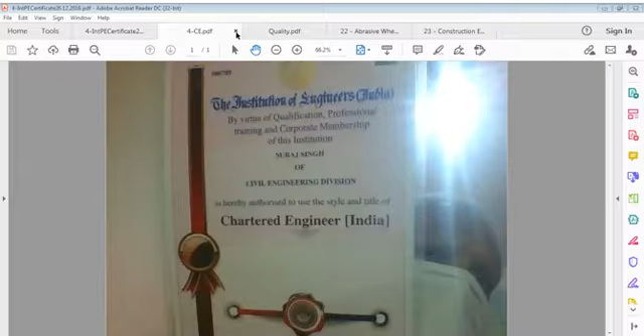Or you can say professional certificate in engineering or otherwise as well - all count a lot if you consider them. And if you just think that it's a piece of paper and it's a ticket to buy a job in market, or to buy reputation in society - you can say for those who have not married to raise their market value, or for those who are married to raise their job value, that is a different one. That is something related to your requirement and related to market requirement. I'm not stressing on that, that's your right.

If you are capable, you shall get job, and if you are not capable, you may get different type of jobs. But wherever you work, one point is very much certain: it is the duty of those professionals, paraprofessionals and others to work with quality aspect and with safety aspect, so that health of everyone remains intact, safety of work is under cover, no work should be unsafe, no person should be unsafe at any time, within controls, within applications. That is the major point.

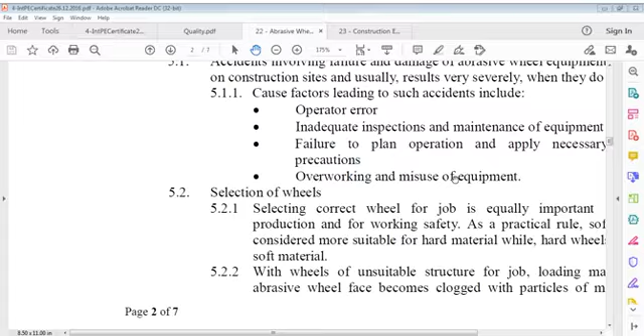We were talking about abrasive wheels last time, abrasive wheels. And we talked about many aspects. Let us go back to what we discussed in those abrasive wheels: purpose, definitions, what these grinders and wheels are like, how can we keep ourselves safe and working safe, what are coarse, medium, fine, very fine types, mountings, etc.

And what we should do in this, what are guards, rests for wheels - all we studied that. Wheel balance, conditions of floor, all we studied in that. Eye protection, etc. we studied in that. Now we go to environment, control and waste disposal.

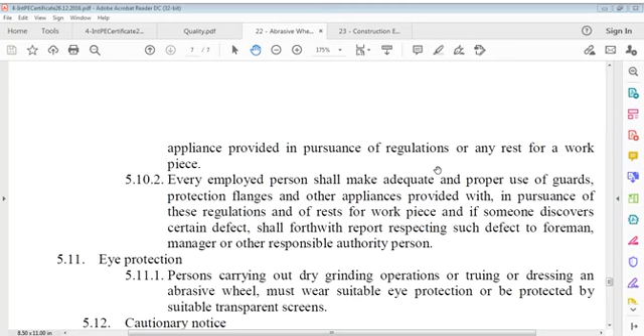I think maybe we did not miss anything in the last chapter, let me be sure. And it was: every employed person shall make adequate and proper use of guards. So let's repeat the last one better, the last fifth page I'll take, so that let us take this.

Let's start here. Summary of mounting precautions. Before mounting, all wheels should be closely inspected and rung to make sure that they have not been mishandled in transit or storage. Means when you open that out, you have to check that. Only competent and authorized persons should carry out wheel mounting.

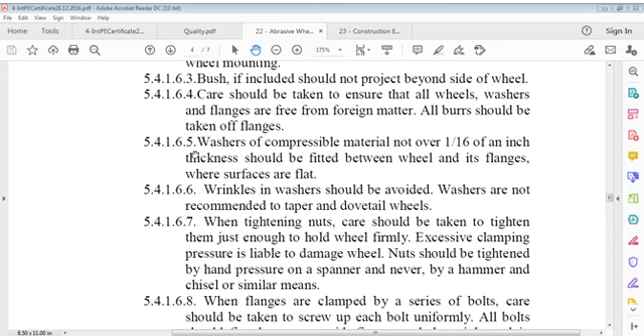Bush, if included, should not project beyond side of wheel. Care should be taken to ensure that all wheels, washers and flanges are free from foreign matter. All burrs should be taken off flanges. Washers of compressible material not over 1/16 of an inch thickness should be fitted between wheels and its flanges where surfaces are flat.

So we have gone through this. Wrinkles in washers should be avoided. Washers are not recommended to taper and dovetail wheels. When tightening nuts, care should be taken to tighten them just enough to hold wheel firmly. Excessive clamping pressure is liable to damage wheel. Nuts should be tightened by hand pressure on a spanner and never by a hammer and chisel or similar means.

Nuts should be tightened by hand pressure on a spanner and never by a hammer and chisel or similar means. When flanges are clamped by a series of bolts, care should be taken to screw up each bolt uniformly. All bolts should first be run up with fingers and then tightened in pattern formation afterwards.

Guards, of course, we discussed guards also. Just repeat it fast: guards shall be securely attached to the body of the machine or straight side wheels. Maximum angular exposure to abrasive periphery and side shall not exceed 180 degrees. Guards for straight grinding machine should be provided with a front curtain which shall be securely fastened to body of machine. For cup wheel, back face and periphery shall be enclosed and guard shall be adjusted to compensate for wear of wheel.

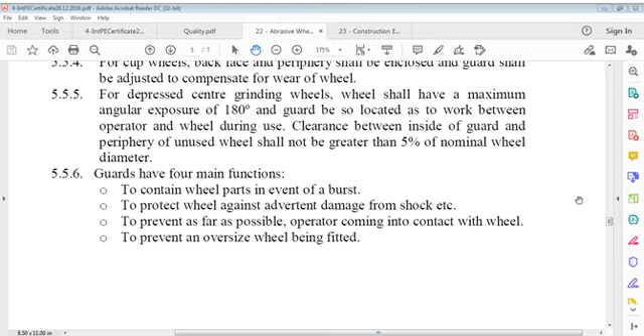Then guards have four main functions. One is to contain wheel parts in event of a burst, meaning wheel parts should be contained within the guard if there's some explosion or burst. To protect wheel against inadvertent damage from shock. To prevent as far as possible operators coming into contact with wheel, and to prevent oversized wheel being fitted.

Rests also we discussed, let us repeat that too. Where there is a rest provided for supporting the work piece, it shall at all times while the wheel is in motion be properly secured and adjusted so as to be as close as practical to the exposed part of the abrasive wheel. Every rest provided must be of substantial construction and properly maintained.

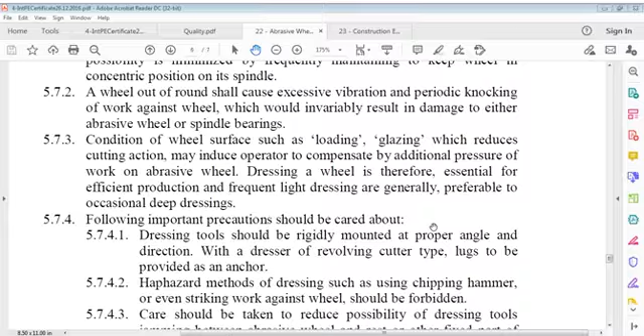Condition of wheel surface such as loading, glazing, which reduce cutting action, may induce the operator to compensate by applying additional pressure of work on the abrasive wheel.

Condition of wheel surface such as loading or glazing, which reduces cutting action, may induce the operator to compensate by additional pressure of work on the abrasive wheel. Dressing a wheel is therefore essential for efficient production, and frequent light dressings are generally preferable to occasional deep dressing.

Now there are certain precautions which must be taken care of. Dressing tools should be rigidly mounted at the proper angle and direction, and with a revolving cutter type dresser, lugs should be provided as an anchor.

Haphazard methods of dressing, such as using a chipping hammer, or even striking work against the wheel, should be forbidden.

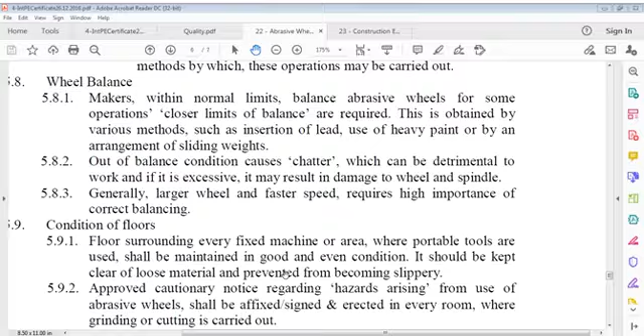Out of balance condition causes chatter, which can be detrimental to work, and if it's excessive, it may result in damage to the wheel and spindle. Generally, larger wheels and faster speeds require greater importance on correct balancing.

Condition of floors. Floors surrounding every fixed machine, or the area where portable tools are used, shall be maintained in good and even condition. It should be kept clear of loose material and prevented from becoming slippery.

An approved cautionary notice regarding hazards arising from the use of abrasive wheels shall be affixed, signed, and erected in every room where grinding or cutting is carried out.

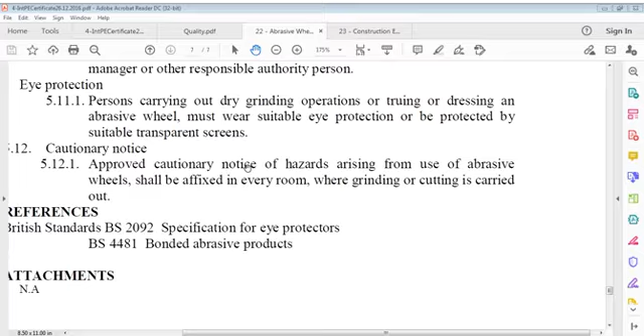References are BS codes 2092 and 4481. One is specific for eye protection, the other for bonded abrasive products.

And then we can go to environmental controls and waste disposal. This is a very interesting topic for everybody, and this point must be understood properly.

So, environment control and waste disposal is what I'm talking about, which is very interesting for everybody. What are we actually talking of here? Adherence to requirements in the environmental control procedure shall minimize the impact of construction activities on land, air, water, flora and fauna.

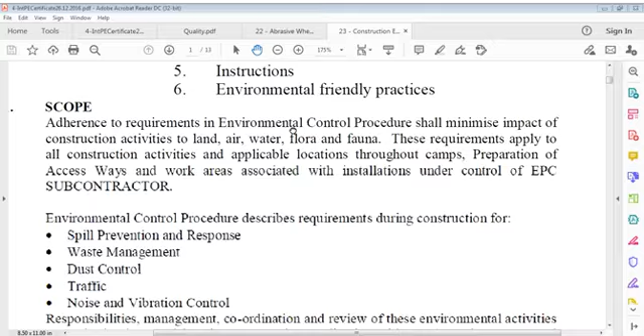Environmental protection we are talking about, environment control and waste disposal.

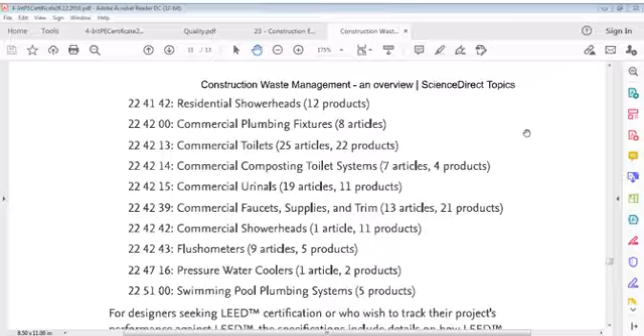So we'll go back. Now, choosing materials and products, choosing materials and products. This is a paper written by Sam Kubba, PhD, LEED AP, on Green Construction Project Controls, Construction Waste Management.

General application of a construction waste management plan is to minimize the amount of materials going to landfills during construction, by diverting construction waste, demolition, and land clearing debris from landfill disposal. It also helps redirect recyclable recovered resources back to the manufacturing process, and redirect reusable materials to appropriate sites.

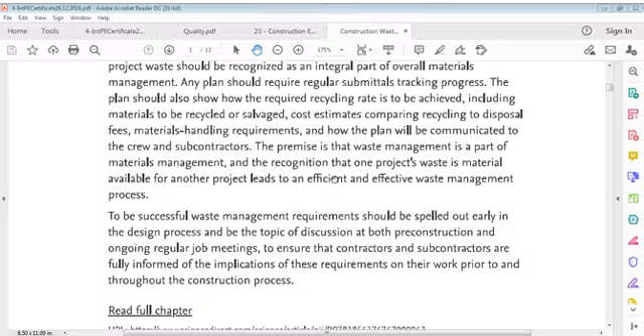The premise is that waste management is a part of materials management, and recognition that one project's waste can be a material available for another project leads to an efficient and effective waste management process. It's a very important point.

Waste management requirements should be spelled out early in the design process, and should be the topic of discussion at both pre-construction and ongoing regular job meetings, to ensure that contractors and subcontractors are fully informed of the implications of these requirements on their work, prior to and throughout the construction process.

We have LEED trademark documentation, process, and technical requirements here. So, summary of best practices: locate in an existing building and reuse as much of the building materials as possible.

Provide easily accessible collection and storage points for recyclable material. Apply construction waste management operations in building out a tenant space to reduce debris, by recycling these materials. Property management firms, for example, require contractors to recycle a minimum of 50% of waste generated on site.

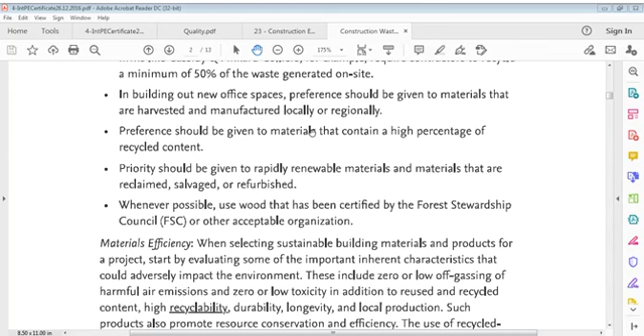In building out new office spaces, preference should be given to materials that are harvested and manufactured locally or regionally, and to materials that contain a high percentage of recycled content. Priority should be given to rapidly renewable materials and materials that are reclaimed, salvaged, or refurbished. Whenever possible, use wood that has been certified by the Forest Stewardship Council or other acceptable organizations.

Materials efficiency: when selecting sustainable building materials and products for a project, start by evaluating some important inherent characteristics that could adversely impact the environment. These include zero or low off-gassing of harmful air emissions, and zero or low toxicity, in addition to reused and recycled content, high recyclability, durability, longevity, and local production.

I repeat: when selecting sustainable building materials and products for a project, start by evaluating some important inherent characteristics that could adversely impact the environment. These include zero or low off-gassing of harmful air emissions and zero or low toxicity, in addition to reused and recycled content, high recyclability, durability, longevity, and local production.

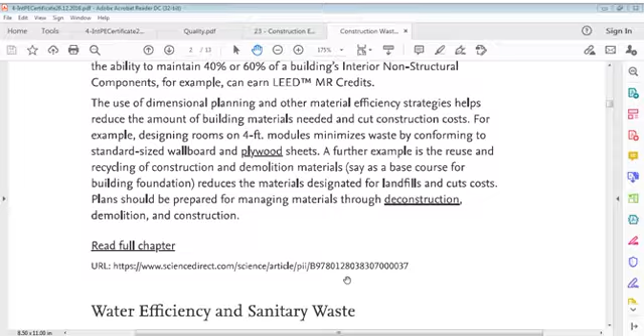Use of dimensional planning and other material efficiency strategies helps reduce the amount of building materials needed and cut construction costs. For example, designing a room on 4-foot modules minimizes waste by conforming to standard sized wallboard and plywood sheets. A further example is reuse and recycling of construction and demolition materials, say as a base course for building foundation, which reduces materials designated for landfills and cuts costs. Plans should be prepared for managing materials through deconstruction, demolition, and construction.

Water efficiency and sanitary waste. Construction waste management.

Commercial construction typically generates between 2 and 2.5 pounds of solid waste per square feet, the majority of which is recyclable. Salvaging and recycling construction and demolition waste can substantially reduce the demand for virgin resources and associated environmental impacts. Additionally, effective construction waste management, including appropriate handling of non-recyclables, can reduce contamination from and extend the life of existing landfills. Whenever feasible, reducing initial waste generation is environmentally preferable to reuse or recycling.

A construction waste management plan should recognize project waste as an integral part of overall materials management. The premise being that waste management is part of materials management, and recognizing that one project's waste may be materials available for another project facilitates efficient and effective waste management. Moreover, waste management requirements should be included as a topic of discussion during both the pre-construction phase and ongoing regular job meetings, to ensure contractors and subcontractors are fully aware of the implications of these requirements on their work, prior to and throughout construction. Waste organization should be coordinated with the standard quality assurance program and addressed regularly throughout the project.

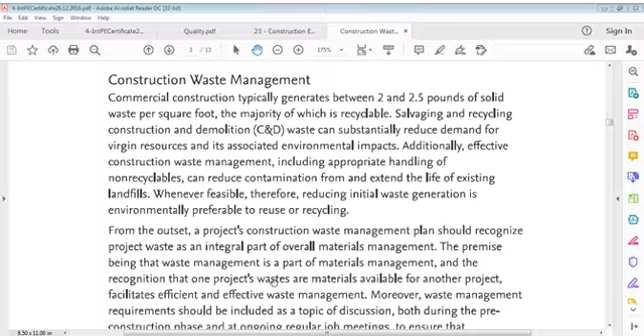Construction waste management. Commercial construction typically generates between 2 and 2.5 pounds of solid waste per square feet, as we said before, the majority of which is recyclable. Salvaging and recycling construction and demolition, or C&D, waste can substantially reduce demand for virgin resources and its associated environmental impacts. Additionally, effective construction waste management organization, including appropriate handling of non-recyclables, can reduce contamination from and extend the life of existing landfills. Whenever feasible, reducing initial waste generation is environmentally preferable to reuse or recycling.

From the outset, the project's construction waste management plan should recognize project waste as an integral part of overall materials management. The premise being that waste management is part of materials management, and recognition that one project's waste or materials may be available for another project facilitates efficient and effective waste management. Moreover, waste management requirements should be included as a topic of discussion both during the pre-construction phase and ongoing regular job meetings, to ensure contractors and appropriate subcontractors are fully aware of the implications of these requirements on their work prior to and throughout construction.

Construction waste management, I think it's the same. It's the same. I think there's some repetition on this, it's useless.

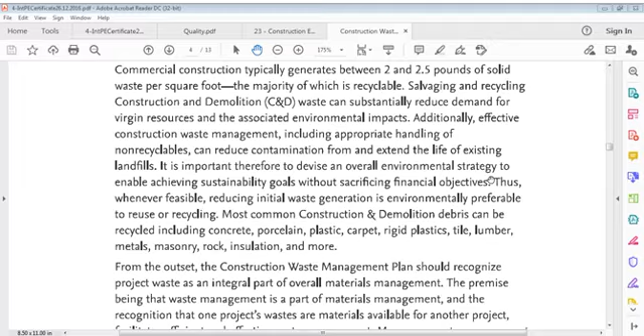So, construction waste management, sir.

The broad intent of the construction waste management credit is to avoid material going to landfills during construction, by diverting construction, demolition and land clearing debris from landfill disposal.

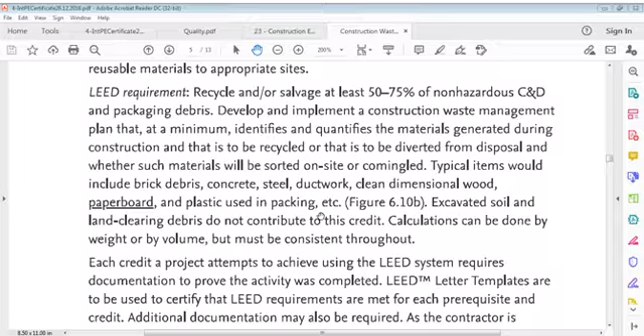Develop and implement a construction waste management plan that, at a minimum, identifies and quantifies materials generated during construction that are to be recycled or diverted from disposal, and whether such materials shall be sorted on site or commingled. Typical items would include brick debris, concrete, steel, ductwork, clean dimensional wood, paperboard and plastic used in packing, etc. Excavated soil and land clearing debris do not contribute to this credit, as we said.

They give credit for these items.

Calculations can be done by weight or by volume but must be consistent throughout. Each credit a project attempts to achieve using the LEED system requires documentation to prove the activity was completed. LEED letter templates are used to certify that requirements are met for each prerequisite and credit. Additional documentation may also be required.

The contractor is responsible for construction waste organization and shall generally be responsible for completing required LEED letter template documentation for these two credits. Documentation required includes: providing a LEED letter template signed by the architect, owner or other responsible party; tabulating total waste material quantities diverted and the means by which they were diverted; and declaring that credit requirements have been met.

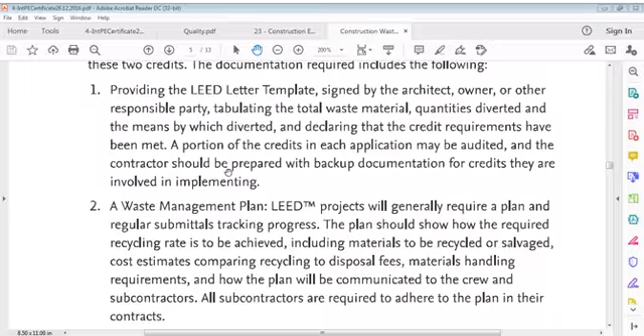A portion of credits in each application may be audited, and the contractor should be prepared with backup documentation for credits that are involved in implementing a waste organizational plan.

Projects will generally require a plan and regular submittals tracking progress. The plan should show how the required recycling rate is to be achieved, including material to be recycled or salvaged, cost estimates comparing recycling to disposal fees, materials handling requirements, and how the plan shall be communicated to crew and subcontractors. All subcontractors are required to adhere to the plan in their contracts.

Design considerations related to construction waste reduction: smaller projects use less material, reducing both solid waste and operating costs.

Assembly should be designed to match standard dimensions of material to be used. Assembly design should be considered so that materials can be readily reused or recycled. Clips and stops should be employed to support drywall or wood paneling at top plates, walls and corners. Clips can provide potential for two-stud corners, reducing wood use, easing electrical and plumbing rough-in, and improving thermal performance.

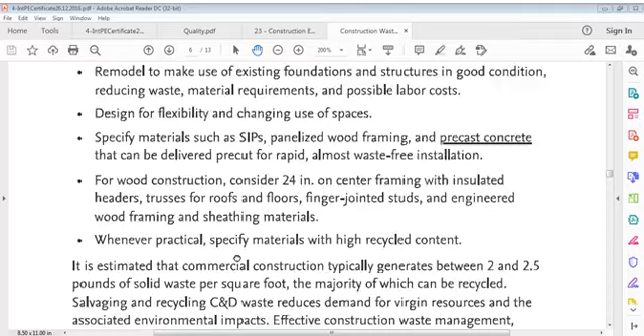Whenever practical, specify materials with high recycled content.

It's estimated that commercial construction typically generates between... this has been given before, so there's some repetition here.

A construction waste management plan should, from the outset, recognize project waste as an integral part of overall materials management — the premise that waste management is part of materials management, and the recognition that one project's wastes are materials available for another.

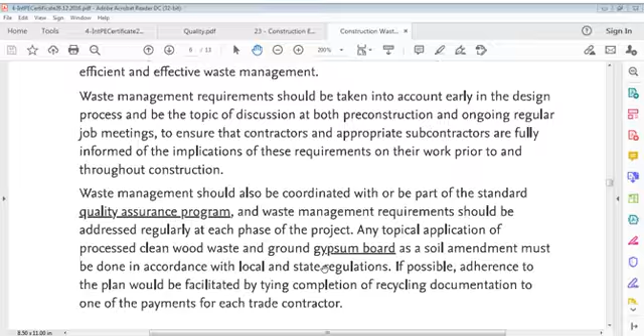Waste management requirements should be taken into account early in the design process and be a topic of discussion at both pre-construction and ongoing regular job meetings. Waste management should also be coordinated with or be part of the standard quality assurance program, and requirements should be addressed regularly at each phase of the project.

Topical application of processed clean wood waste and ground gypsum board are all okay. Now we'll move on to something else.

Construction demolition waste using GIS tools.

GIS consists of a set of tools for storing data, processing and documenting geographic information in a given area of interest. From the perspective of an environmental study, geographic data can represent different elements in local data, such as socio-economic, physical and geological data, among others.

GIS is an evaluation tool that can be used collaboratively with several other modules that estimate environmental impacts and the consequences of a project. In the context of construction waste organization, GIS can have several applications.

GIS can improve the accuracy of building stock models by increasing the availability of geo-referenced information, enabling analysis of material accumulation in time and space. With GIS tools it is possible to perform several spatial analyses applied to construction and demolition waste management, such as mapping illegal dumping sites, assessing environmental risks, and identifying locally suitable areas for installing landfills and recycling plants.

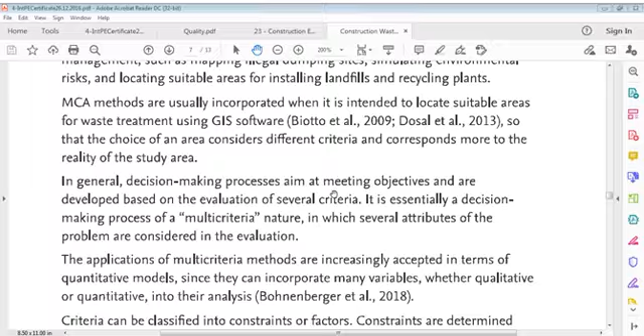MCA methods are usually incorporated when it's intended to locate suitable areas for waste treatment using GIS software, so that choice of an area considers different criteria and corresponds more to reality of the study area. In general, decision-making processes aim at meeting objectives and are developed based on evaluation of several criteria. It is essentially a decision-making process of a multi-criteria nature in which several attributes of problems are considered in evaluation.

Applications of multi-criteria methods are increasingly accepted in terms of quantitative models, since they can incorporate many variables, both qualitative and quantitative, into their analysis. Criteria can be classified into constraints or factors. Constraints are determined according to Boolean logic, a value of 1 or 0, which represent respectively yes or no, to identify suitable areas and remove inappropriate areas from analysis.

On the other hand, factors are of continuous nature and represent a variation of suitability, thus qualifying areas according to characteristics relevant to the study. In order to select suitable locations for receiving and treating waste, the decision maker needs to analyze different aspects such as generator distance, competitiveness and acceptance of the surrounding population, among others. Generally, MCA methods use scores on several criteria correlated to different alternatives, having weights related to compensations between these criteria.

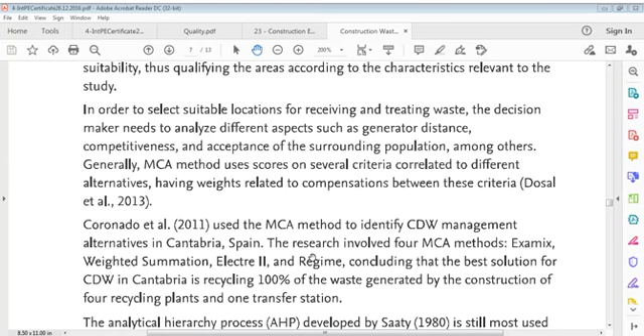Coronado used the MCA method to identify CDW management alternatives in Cantabria, Spain. The research involved four MCA methods. The design concluded that the best solution for CDW in Cantabria is recycling 100% of waste generated, through the construction of 4 recycling plants and one transfer station.

Now, the analytical hierarchy process, AHP, developed by Saaty, is still the most used method for decision making. Traditional methods of area selection include graphical methods, diffuse comprehensive assessment, and gray grouping method. On the other hand, use of GIS and AHP can effectively solve the problem of installing landfills and recycling plants.

Silva developed a methodology to support the decision-making process in choice of the best land alternatives for installation of a CDW recycling plant in the city of Ponta Grossa, Parana, Brazil. The AHP method was used to evaluate environmental, social and economic impacts of the recycling plant installation.

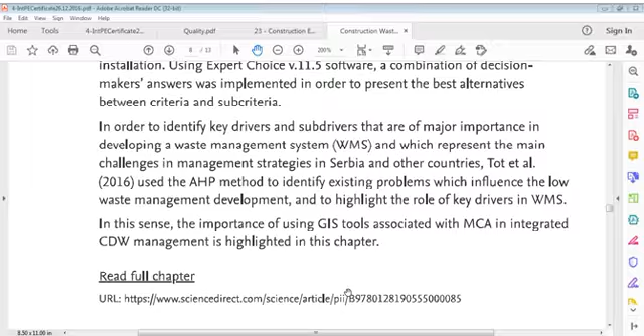In this sense, the importance of using GIS tools associated with MCA in integrated CDW management is highlighted.

Greening your specification. Construction documents typically consist of working drawings and specifications, and are essential to convey the building design concept to the contractor. They provide the contractor with necessary information to bid and build a project. The more accurately a concept is conveyed, the more likely it is to be realized. It's important, therefore, that building specifications be an integral part of written documents and that they go hand in hand with drawings. They describe materials to be used as well as methods of installation.

They also prescribe quality and standard of construction required to be achieved on the project. Thus, in order to facilitate communication of the building design concept, the construction industry has a standardized format for construction documents. Working drawings describe location, size and quantity of materials, whereas specifications, written documents that accompany working drawings, describe quality of construction. For example, if a working drawing shows a plaster wall, specifications would include description of plaster mix, lath and paper backing, and finishing techniques.

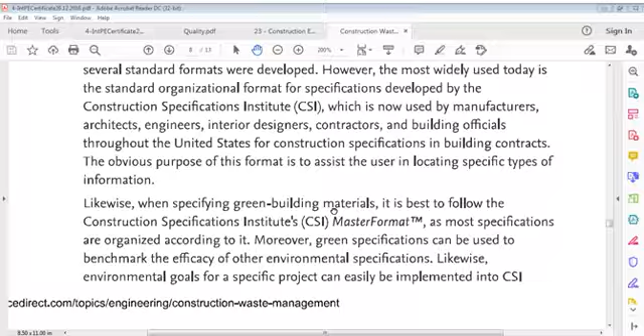Likewise, when specifying green building materials, it's best to follow the Construction Specifications Institute master format, as most specifications are organized according to it. Moreover, green specifications can be used to benchmark efficacy of other environmental specifications. Likewise, environmental goals for a specific project can easily be implemented in the CSI, Construction Specifications Institute master format.

There is also a wealth of information on greening your specifications on the internet. EPA format in particular is designed to help supplement project specifications. Furthermore, the EPA team shall reportedly assist in development of modifications of project specifications to meet LEED credit requirements. But in order to achieve this, a clear understanding is necessary of how specifications can best be used as a proactive mechanism to assist in procuring materials that are environmentally friendly and in collecting required LEED information for subcontractors and suppliers.

Building Green has extensive information on sustainable design based on CSI hierarchy. Specifications are general guidelines as to product selection and installation and may not be appropriate for a specific project, which is why before using Building Green guideline specifications, the reader should read the disclaimer. Further information regarding GreenSpec can be found on buildinggreen.com.

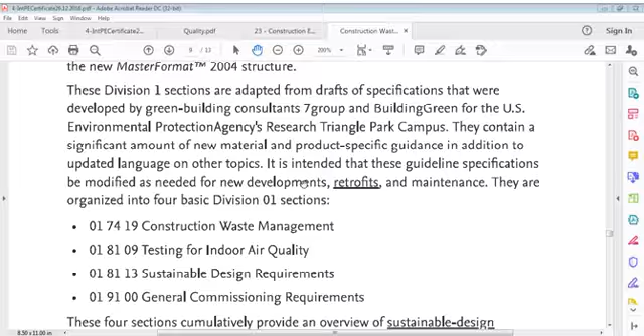They contain a significant amount of new material and product specific guidance in addition to updated language on other topics. It's intended that these guideline specifications be modified as needed for new developments, retrofits, and maintenance. They are organized into four basic divisions of 01.

Construction waste management organization, testing for indoor air quality, sustainable design requirements, and general commissioning requirements. These four sections cumulatively provide an overview of sustainable design requirements that may be applied to a wide variety of projects.

When these sections are applied in actual project specifications, specific requirements must be inserted throughout the construction documents to ensure compliance with sustainable design intent. In the revised GreenSpec format, product listings in each division are divided into separate sections, following as much as possible the MasterFormat system. Each section starts with a summary of environmental considerations relating to products in that section.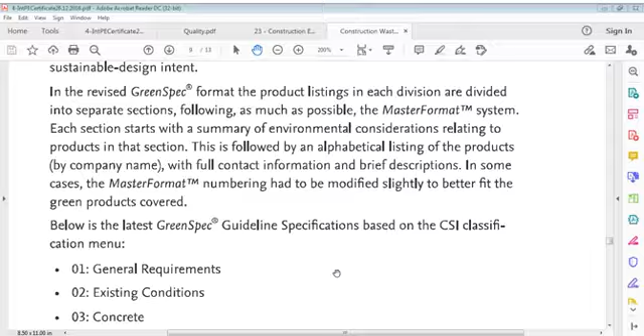These divisions, the MasterFormat numbering had to be modified slightly to better fit green products coverage. Below is the latest GreenSpec CSI classification: general requirements, existing conditions, concrete, masonry, metals, wood, plastics and composites, thermal and moisture protection, openings, finishes, specialties, equipment, furnishings, special construction, conveying equipment, plumbing.

So we say, what are specialties? We have to read. Just a minute please, let me put on my switch. I have to take some water. I'll put the electric switch on.

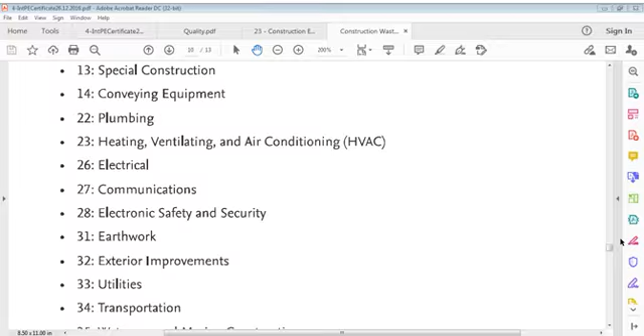So in this list we can say: general requirements, existing conditions. These guideline specifications are based on the CSI classification menu: general requirements, existing conditions, concrete, masonry, metals, wood, plastics and composites, thermal and moisture protection, openings, finishes, specialties, equipment, furnishings, special construction, conveying equipment, plumbing, heating ventilation and air conditioning, electrical, communications, electronic safety and security, earthwork, exterior improvements, utilities, transportation, waterway and marine construction, process heating cooling and drying equipment, pollution control equipment, electric power generation.

More detailed information by simply clicking, or leave it now. For example, by clicking on this plumbing section you will get additional information, such as operation and maintenance of plumbing fixtures.

Operation and maintenance of plumbing fixtures, plumbing insulation, domestic water piping, sanitary sewerage facilities, sanitary waste and vent piping facilities, storm drainage, grey water systems, domestic water filtration equipment, fuel fired residential water heaters, fuel fired commercial water heaters, domestic water heat exchangers, residential toilets.

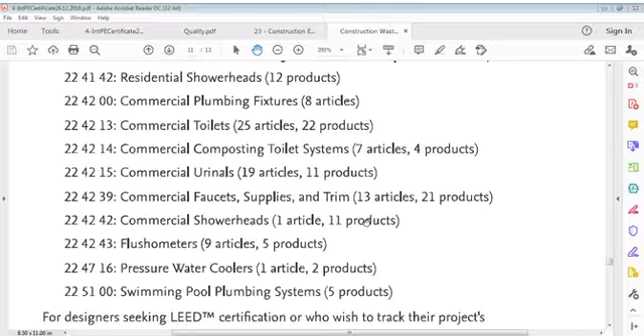Composting toilets, residential urinals, residential lavatories and sinks, residential faucets, supplies and trim, residential shower heads, commercial plumbing fixtures, commercial toilets, commercial composting toilet systems, commercial urinals, commercial faucet supplies and trim, commercial shower heads, flushometers, pressure water coolers, swimming pool plumbing systems.

For designers seeking certification, or who wish to track their project's performance against LEED, the specifications include details on how LEED requirements relate to the expressed requirements. Many LEED credits may not be addressed directly in the guideline specifications, primarily because attaining those credits is determined by choices made in site selection or design, and are not affected by product choices or other activities covered by these sections. Responsibility lies with the designer to ensure that whatever such credits have been satisfactorily addressed in the design and construction process.

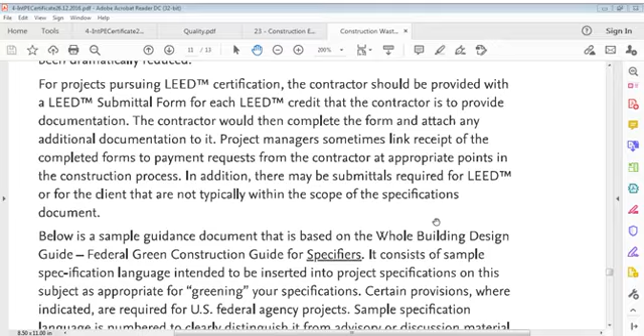Below is a sample guidance document based on the Whole Building Design Guide, Federal Green Construction Guide for Specifiers. It consists of sample specification language intended to be inserted into the project specification on this subject as appropriate for greening your specification. Certain provisions, where indicated, are required for US federal agency projects. Sample specification language is numbered to clearly distinguish it from advisory or discussion materials. Each sample is preceded by identification of its typical location in the specification section. I'll also leave this. Now, specifier note.

Resource management: plant fabrication handles raw materials and byproducts at a single location, which typically allows greater efficiency and better pollution prevention than job site fabrication.

Aggregates for use in concrete include normal sand and gravel, crushed stone, expanded clay, expanded shale, expanded slate, pelletized or extruded fly ash, expanded slag, perlite, vermiculite, expanded polystyrene beads, processed clay, diatomite, pumice, scoria or tuff.

Architectural items such as planters, lintels, and bollards fabricated from lightweight and recycled content aggregates are available. Quantity and type of recycled materials vary from manufacturer to manufacturer and include cellulose, fiberglass, polystyrene and rubber.

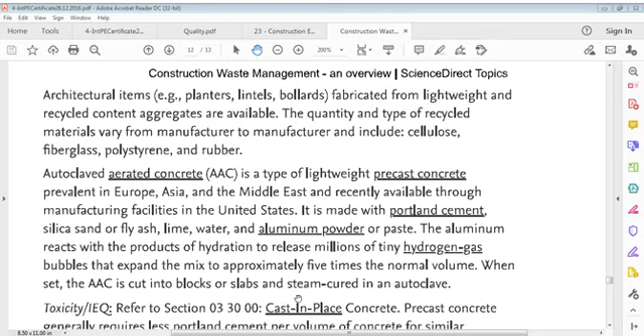Autoclaved aerated concrete (AAC) is a type of lightweight precast concrete prevalent in Europe, Asia and the Middle East, and recently available through manufacturing facilities in the United States. It's made with Portland cement, silica, sand, fly ash, lime, water, and aluminum powder or paste. Aluminum reacts with products of hydration to release millions of tiny hydrogen gas bubbles that expand the mix to approximately 5 times its normal volume. Once set, AAC is cut into blocks and slabs and steam cured in an autoclave.

Compared to cast-in-place concrete, precast concrete generally requires less Portland cement per volume of concrete for similar performance due to better quality control. Performance is more predictable in precast operations since more exact dimensions, placement of reinforcing, and surface finishing can be obtained. Precast concrete can be fabricated with continuous insulation and autoclaved aerated concrete.

Autoclaved aerated concrete is significantly lighter, about one-fifth the weight of traditional concrete, and can be formed into blocks or panels. Lighter weight concretes generally have greater fire and thermal resistance but less strength than traditional normal weight concrete. A full range of lightweight concrete is available in varying strength.

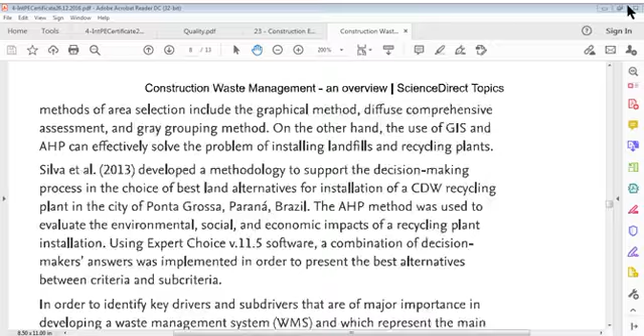Okay, leave it now, we will go further. I'll save this document for reference only. That's all, it's a reference and that's going to work. So I save this and close this document now. We have gone through these documents to see what was there. Now I'll go to close this and construction waste management, and we'll concentrate on this. I was talking of this document which we are destined for.

Adherence to requirements in the environmental control procedure shall minimize the impact of construction activities on land, air, water, flora and fauna. These requirements apply to all construction activities and applicable locations throughout camps, including preparation of access ways and work areas associated with installations under control of the contractor, whatever contractor. The environmental control procedures describe requirements during construction for spill prevention and response, waste organization management, dust control, traffic, noise and vibration control.

Organization, coordination and review of these environmental activities are to be implemented by the site leader in coordination with the quality department and safety department. The environmental control procedure describes environmental compliance activities for the EPC contractor, construction personnel and their subcontracted entities.

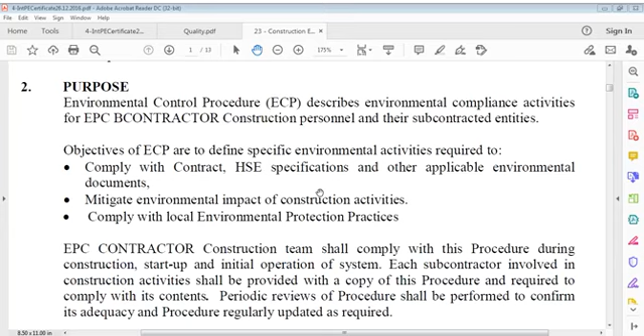Environmental control procedures describe environmental compliance activities for the EPC contractor, construction personnel and their subcontracted entities. Objectives of the ECP are to define specific environmental activities required to comply with contract and safety specifications, HSE specifications, and other applicable environmental documents; to mitigate environmental impact of construction activities; and to comply with local environmental protection practices. The EPC contractor construction team shall comply with this procedure during construction, startup and initial operation of the system. Each subcontractor involved in construction activities shall be provided with a copy of this procedure and required to comply with its contents. Periodic reviews of the procedure shall be performed to confirm its adequacy,

and the procedure regularly updated as required.

Definitions in this safety section - we defined safety already: safety, health, environment. These disciplines support project activities, and company, who is a promoter, contractor, subcontractor, client. Personal responsibility means training, management, safety manager - all same, nothing new in this.

Employer, representative, contractor representative, waste - yes, waste is important here. Material or effluent or other unwanted surplus substance that requires disposal because it cannot be reused or recycled or there is no economic demand for it.

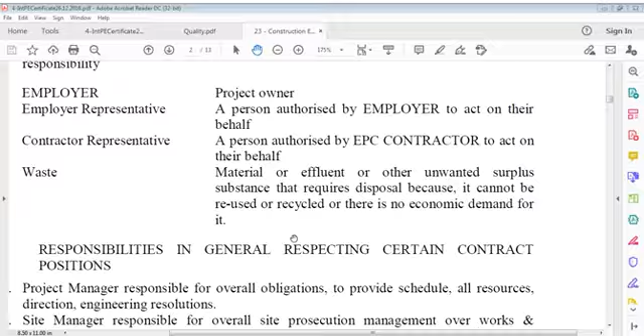Responsibilities in general respecting certain contract positions. We know project manager has to do everything, responsible for everything. Site leader, safety leader, construction leader, project site engineer, safety inspector, etc. - all uniformly, all the time. Responsibilities same way we can say instructions here, meaning health, safety and environment impact assessment.

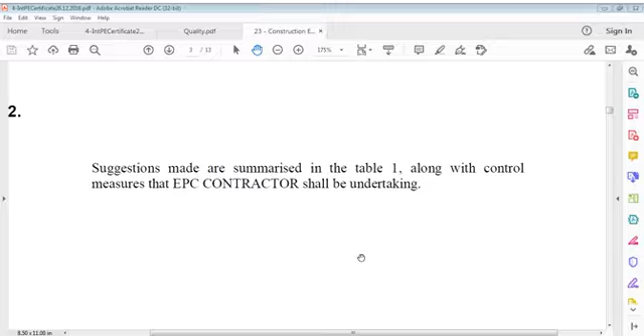This assessment prepared includes an assessment of impact of construction activities and construction camp on environment, and suggests measures to mitigate impact. Now we are giving some suggestions along with control measures that contractors shall be undertaking in this table 1.

Table 1 - I will squeeze it down so we can see better. Maybe it's difficult to read, but I'll blow it up later. Here is environmental issue, suggestions, and contractors control measures. One issue is contaminated land. Another issue is protection of groundwaters and wadis. Then site preparation, dust, noise, construction camp, oil spillage. Let us consider these one by one.

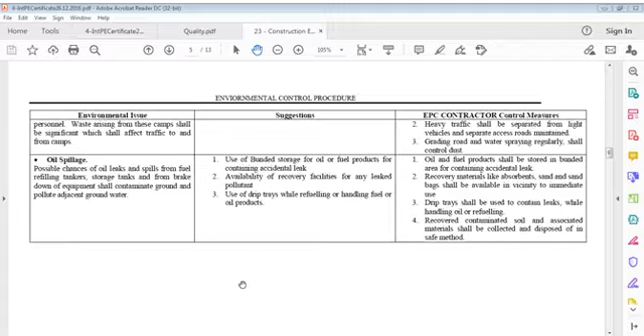Contaminated land - what is that? Contamination of land by some accidental oil spill or effluent during construction activities. So what happens? Solution is soil from areas of contamination shall be removed and disposed of to an approved landfill location. Contractors shall contact local authorities for disposing contaminated soil in appropriate landfill.

Next is protection of groundwater and wadis. Groundwaters and other water sources like wadis are utilized for agriculture and cattle feeding by local population, and for weeds and plants growing in the area. This water source has to be protected from pollution from construction activities.

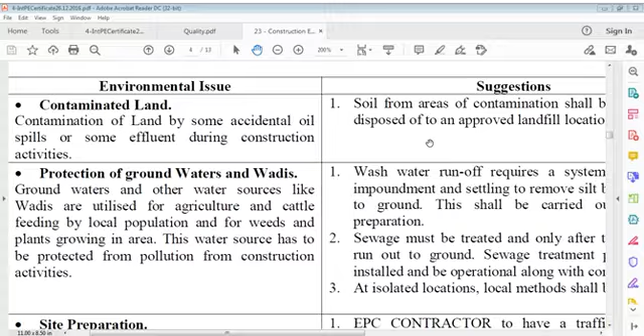Wash water runoff requires a system of temporary impounding and settling to remove silt before returning to ground. This shall be carried out during site preparation, along with a silt retention trap constructed at all wash water facilities. This retention trap shall allow settling of sand, silt and grease, etc.

Sewage must be treated and only after that allowed to run out to ground. Sewage treatment plants shall be installed and be operational along with the construction camp. At isolated locations, local methods shall be followed - sewage treatment plant shall be installed at each camp to control sewage.

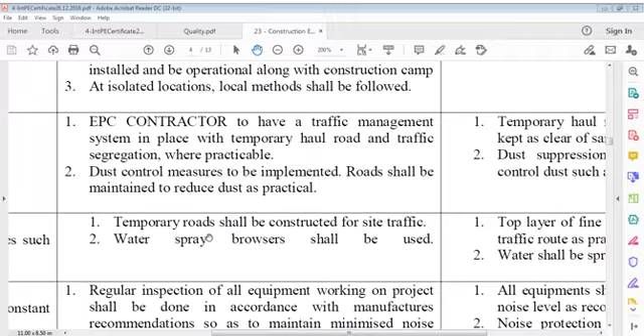In this case, contractor to have a traffic management system, traffic organization system in place with temporary haul roads and traffic segregation where practicable. Dust control measures to be implemented - roads shall be maintained to reduce dust as practical, temporary haul roads constructed and kept as clear of sand as practicable, and dust suppression measures such as water sprays shall be used.

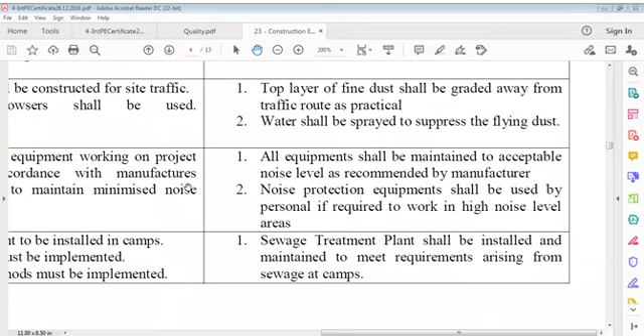Dust shall be exacerbated by site activities such as stepping and vehicle movement, as the area experiences sandstorms. Water spray bowsers shall be used. Top layer of fine dust shall be graded away from traffic route as practicable, and water shall be sprayed to suppress flying dust.

Noise - excessive noise level created by constant operation of plants and equipment. Regular inspection of all equipment working on the project shall be done in accordance with manufacturer's recommendations so as to maintain minimized noise levels. All equipment shall be maintained to acceptable noise level as recommended by manufacturer, and noise protection equipment shall be used by personnel if required to work in high noise level areas.

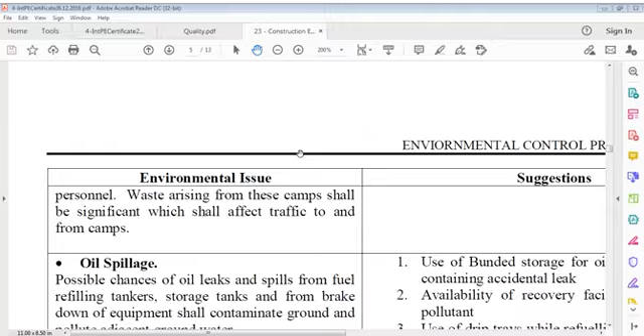Oil spillage - possible chances of oil leaks and spills from fuel refilling tankers, storage tanks and from breakdown of equipment shall contaminate ground and pollute adjacent groundwater. Use of bunded storage for oil is required.

Use of bunded storage for oil or fuel products for containing accidental leaks.

Availability of recovery facilities for any leaked pollutant.

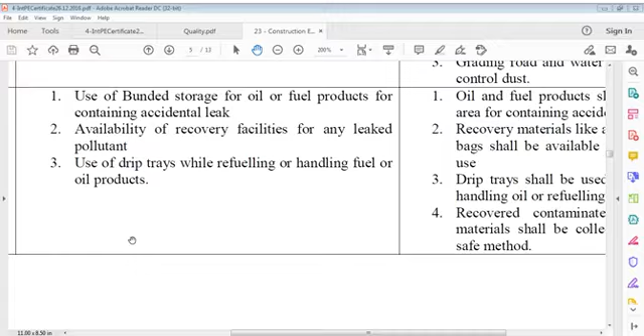Use of drip trays while refueling or handling fuel or oil products. Oil and fuel products shall be stored in a bunded area for containing accidental leaks. Recovery materials like absorbents, sand and sandbags shall be available in the vicinity for immediate use. Drip trays shall be used to contain leaks while handling oil or refueling.

Recovered contaminated soil and associated materials shall be collected and disposed of in a safe method.

So now we go to, after going through that, spill prevention and response. Let me take some more water and then come back.

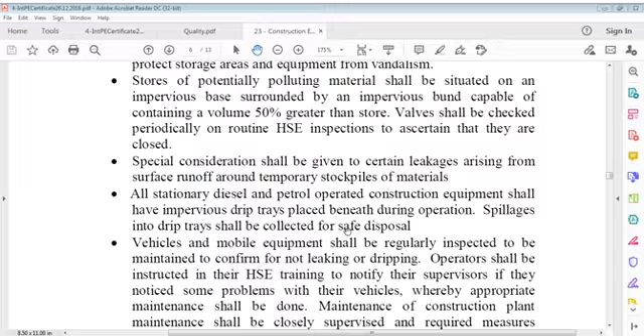Valves shall be checked periodically on routine HSE inspections to ascertain that they are closed. Special considerations shall be given to certain leakages arising from surface runoff around temporary stockpiles of materials.

All stationary diesel and petrol operated construction equipment shall have impervious drip trays placed beneath during operation. Spillages into drip trays shall be collected for safe disposal.

Vehicles and mobile equipment shall be regularly inspected and maintained to confirm they are not leaking or dripping. Operators shall be instructed in their safety training to notify their supervisors if they notice problems with their vehicles, whereby appropriate maintenance shall be done.

Maintenance of construction plant shall be closely supervised and required measures implemented to prevent hydrocarbon contamination. These measures include use of drip trays, absorbent materials close at hand, and careful disposal of used materials.

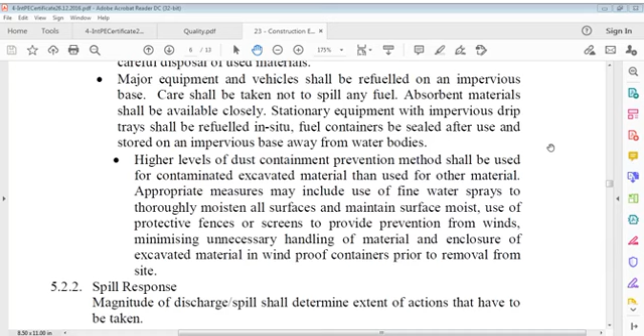Magnitude of discharge spill shall determine extent of actions that have to be taken. Key actions in responding to a spill to minimize its environmental impact are early detection.

Regular inspections and training shall be carried out to enable early detection. It is everyone's responsibility to be aware of potential pollution risks.

Notify your supervisor or emergency team. Notify supervisor, who shall notify leader of site and safety. Emergency services shall be notified as necessary. Assess safety risks to humans.

Attempt containment and cleanup operations of spilled substances only when it can be performed safely. If spilled material is flammable, eliminate sources of ignition near the spill area.

Personnel and neighbors are to be evacuated if they are prone to risk. Secure area and establish perimeter control at safe distance from spill. Stop sources of spill.

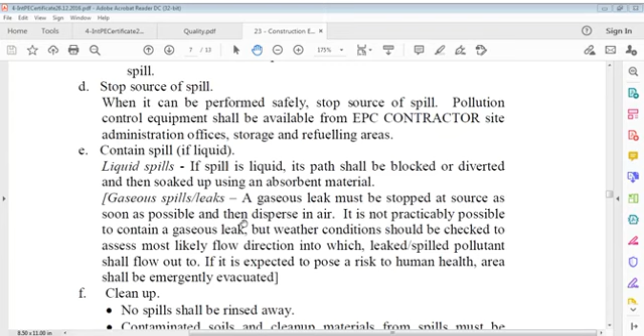Contain spills if liquid. If spill is liquid, its path shall be blocked or diverted and then soaked up using an absorbent material.

Gaseous spills or leaks: a gaseous leak must be stopped at source as soon as possible and then dispersed in air. It's not practically possible to contain a gaseous leak.

Weather conditions should be checked to assess most likely flow direction into which leaked or spilled pollutant shall flow out to. If it's expected to pose a risk to human health, the area shall be emergently evacuated.

Clean up. No spills shall be rinsed away. Contaminated soils and clean up materials from spills must be handled properly using personal protective equipment, stored in a suitable container that is then labeled and stored in appropriate location for subsequent disposal.

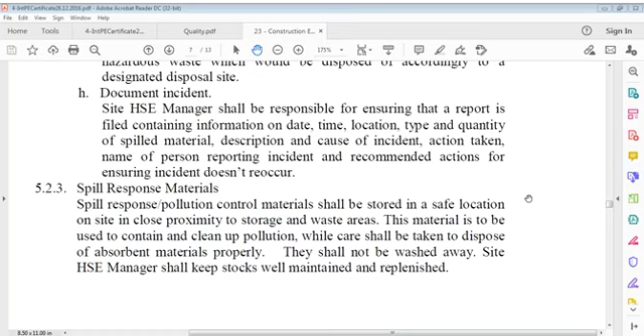Spill response materials: pollution control materials shall be stored in a safe location on site in close proximity to storage and waste areas. This material is to be used to contain and clean up pollution, while care shall be taken to dispose of absorbent materials properly. They shall not be washed away. Site HSE Manager shall keep stocks well maintained and replenished.

Spill response materials shall include the following: sandbags, buckets and shovels, storage containers.

Sand is one of the most versatile containment materials, which can be used to soak up spillages of oil and chemicals and used in sandbags either to block off substances from sensitive areas or channel them off to a predetermined collection point.

Sand stocks must be dry. Buckets and shovels should be readily available. Mechanical loading shovels, excavators and dump trucks may also be available for sand distribution.

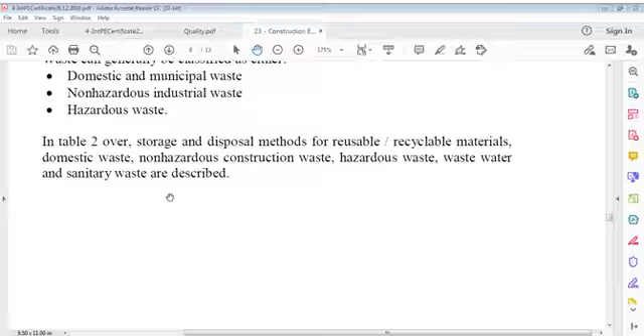In Table 2, storage and disposal methods for reusable and recyclable materials, domestic waste, non-hazardous construction waste, hazardous waste, waste water and sanitary waste are described.

Now we are entering Table 2. Let us see all wastes: reusable, recyclable, domestic waste, non-hazardous construction waste, hazardous waste. So we go like this, okay? Category: storage and disposal. All wastes.

A specific area shall be designated for storage of waste before it is disposed of from site. The selected site should stand away from water bodies and drainage ditches, and shall be located on hard core to minimize risk of soil contamination.

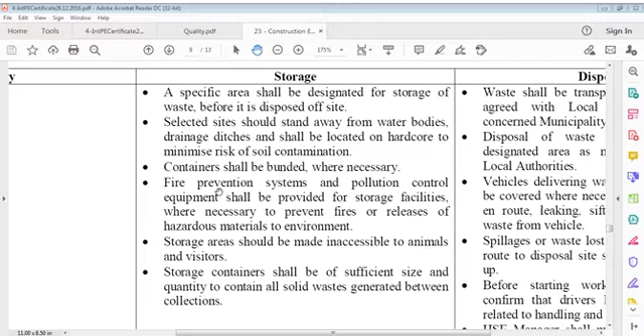Containers shall be bunded where necessary. Fire prevention systems and pollution control equipment shall be provided for storage facilities where necessary to prevent fires or releases of hazardous materials to the environment. Storage areas should be made inaccessible to animals and visitors. Storage containers shall be of sufficient size and quantity to contain all solid waste generated between collections.

Reusable. Disposal: waste shall be transported to a designated area agreed with local authorities, which is the concerned municipality. Disposal of waste shall be delivered to the designated area as necessary, supervised by the local authority.

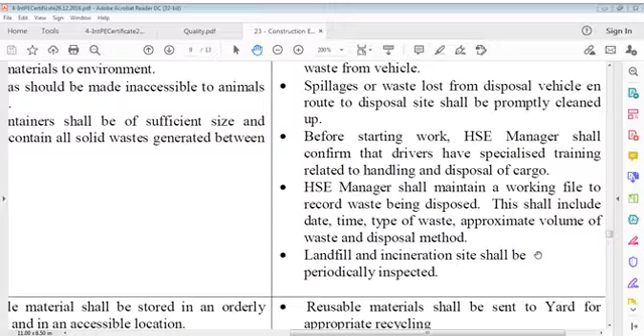HSE Manager shall maintain a working file to record waste being disposed, including date, time, type of waste, approximate volume of waste, and disposal method. Landfill and incineration sites shall be periodically inspected. Reusable, recyclable: timber, metal, paper.

Now, domestic reusable recyclable means timber, metals, papers. Reusable material shall be stored in an orderly manner and in accessible location. Reusable material shall be sent to yard for appropriate recycling.

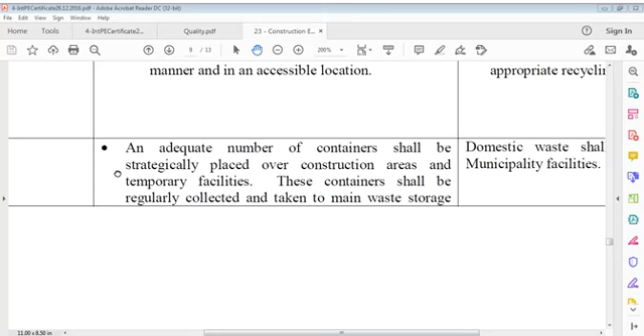Domestic waste, food waste, domestic food trash, an adequate number of containers shall be strategically placed over construction areas and temporary facilities. These containers shall be regularly collected and taken to main waste storage area.

All food waste shall be properly stored in containers with sealed tops to minimize possibility of vermin infestation. Domestic waste shall be disposed of through municipal facilities.

Then non-hazardous construction waste: combustible, that is non-reusable timber, card, packaging waste, and non-combustible, concrete, etc. Construction debris and demolition materials shall not be allowed to accumulate such that it presents an environmental, health and/or safety hazard. Inert construction waste shall be segregated into combustible and non-combustible.

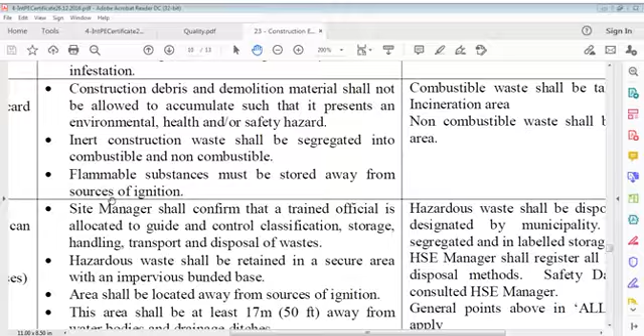And this is for non-hazardous construction waste. Combustible, that is non-reusable timber, card, packaging waste. Non-combustible, namely concrete. These debris should not be allowed to accumulate to present an environmental, health and safety hazard. Inert construction waste shall be segregated into combustible and non-combustible.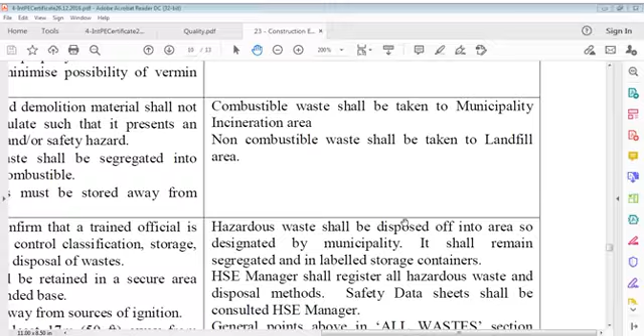Flammable substances must be stored away from sources of ignition. Combustible waste shall be taken to municipality incineration area. Non-combustible waste shall be taken to landfill areas.

So we say here now, hazardous waste. This is an important one. According to UN classification, hazardous waste can be categorized as follows: explosives, gases including toxic and flammable, liquids including solvents, flammable solids, oxidizing agents and organic peroxides, toxic and harmful substances including toxic metals, radioactive.

Corrosive, including acids and alkalis, and before that radioactive, and then other dangerous substances.

Let us read a little about this. Hazardous waste generated on site may include contaminated land, chemical waste including cleaning fluids, lubricants, paints, dye, coating substances, solvents, corrosion inhibitors, biocides, emulsions, batteries, capacitors, hydrocarbon waste, fire extinguishers.

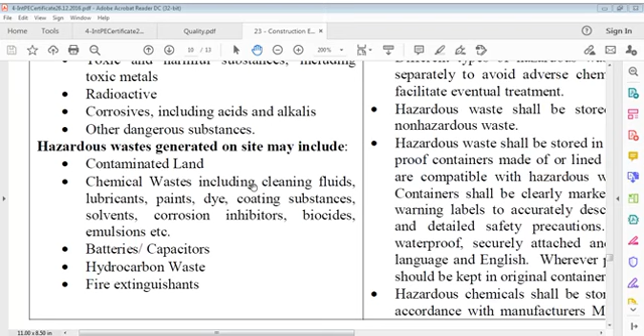We'll talk about these. Shall confirm that a trained official is allocated to guide and control classification, storage, handling, transport and disposal of waste. Hazardous waste shall be retained in a secure area with an impervious bunded base.

So we can say site HSE Manager shall confirm that a trained official is allocated to guide and control classification, storage, handling, transport and disposal of waste. Hazardous waste shall be retained in a secure area with an impervious bunded base. Area shall be located away from sources of ignition. This area shall be at least 17 meters away from water bodies and drainage ditches.

Different types of hazardous waste shall be stored separately to avoid adverse chemical reactions and facilitate eventual treatment. Hazardous waste shall be stored separately from non-hazardous waste.

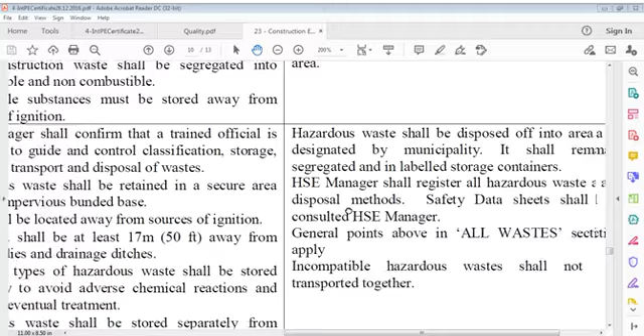Wherever possible, chemicals should be kept in original container. Hazardous chemicals shall be stored and handled in accordance with manufacturer's material safety data. Hazardous waste shall be disposed of into areas designated by the municipality.

It shall remain segregated and in labeled storage containers. HSE Manager shall register all hazardous waste and disposal methods. Safety data sheet shall be consulted. General points above in all waste sections apply. Incompatible hazardous waste shall not be transported together.

Now, and this is also one more. This was hazardous chemicals shall be stored and handled in accordance with manufacturer's material safety data sheet.

Spill prevention measures shall be adhered to. Site HSE Manager shall register all hazardous waste and disposal methods. Safety data sheet shall be consulted by site HSE Manager. Equipment, materials and skills shall be readily available to deal with spillages. Washing facilities shall be available.

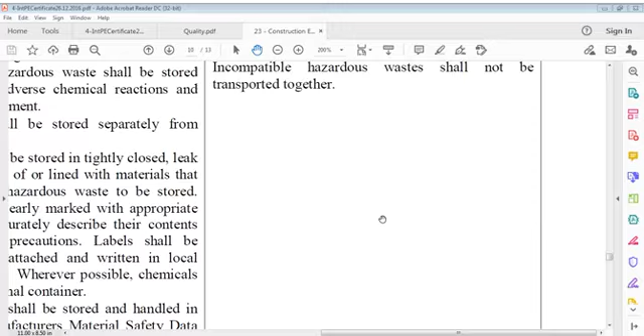And wastewater. Sanitary waste and wastewater. Wastewater and sewage arising from camp are what we're talking of. Storage treatment.

Fresh water supply shall be segregated from wastewater in accordance with health requirements of contract documents. No wastewater shall be injected into groundwater.

Freshwater supply shall be segregated from wastewater in accordance with health requirements and contract documents. All wastewater shall be allowed for settling silt before allowing to drain to ground. All camp units shall be connected to a sewerage main which runs through a PVC pressure line to a treatment system located adjacent to camp.

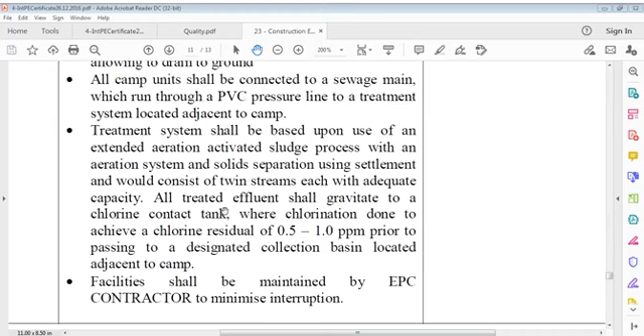Facilities shall be maintained by the EPC contractor to minimise interruption. Treated effluent water shall be used for irrigation and dust control after it has been analyzed to confirm that it's safe for such intended purposes. The sewage treatment plant shall be erected and made operational during the first phase of camp occupancy.

Dust and emissions. The most prevalent construction emission is fugitive dust. However, emission of carbon monoxide and related exhaust gases are likely to be released from diesel generators and other activities, such as on-site painting, refueling of equipment, application of adhesives, waterproofing chemicals, and incomplete combustion of fuel in construction equipment. Note that none of the planned activities shall cause release of hydrogen sulfide gas.

So the most prevalent construction emission is fugitive dust. However, emission of carbon monoxide and related exhaust gases are likely to be released from diesel generators and other activities such as on-site painting, refueling of equipment, application of adhesives, waterproofing chemicals, and incomplete combustion of fuel in construction equipment. Note that none of the planned activities shall cause release of hydrogen sulfide gas. It's also an important point.

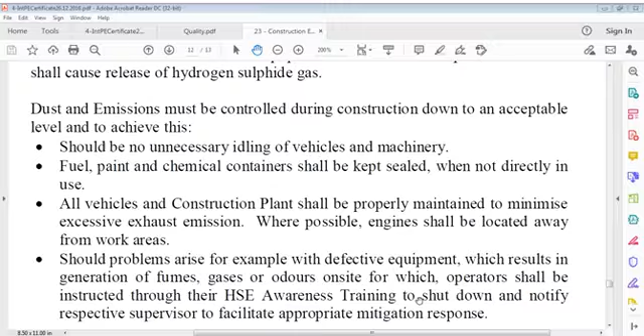Dust and emissions must be controlled during construction down to an acceptable level. To achieve this, there should be no unnecessary idling of vehicles and machinery. Fuel, paint and chemical containers shall be kept sealed when not directly in use. All vehicles and construction plants shall be properly maintained to minimize excessive exhaust emission. Where possible, engines shall be located away from work areas.

Should problems arise, for example with defective equipment which results in generation of fumes, gases or odors on site, operators shall be instructed through their HSE awareness training.

All vehicles and construction plants shall be properly maintained to minimize excessive exhaust emission. Where possible, engines shall be located away from work areas. Should problems arise, for example with defective equipment which results in generation of fumes, gases or odors on site, operators shall be instructed through their HSE awareness training to shut down and notify the respective supervisor to facilitate appropriate mitigations and response.

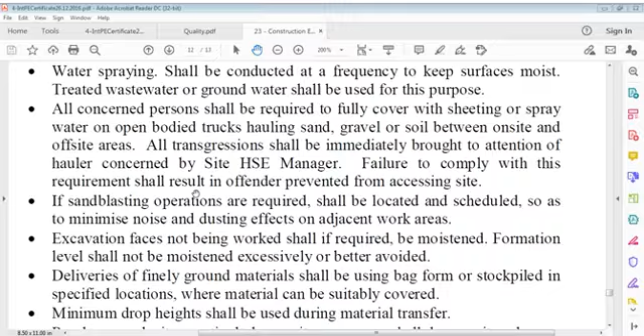If sandblasting operations are required, they shall be located and scheduled so as to minimize noise and dust effects on adjacent work areas.

Excavation faces not being worked shall if required be moistened. Formation levels shall not be moistened excessively, or better avoided. Deliveries of finely ground materials shall be using bag form, or stockpiled in specified locations where the material can be suitably covered.

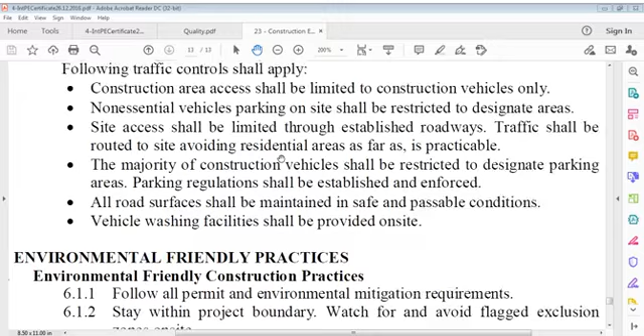All road surfaces shall be maintained in safe and passable conditions. Vehicle washing facilities shall be provided on site. Environmentally friendly construction practices: follow all permit and environmental mitigation requirements.

Follow all permits and environmental mitigation requirements. Stay within project boundary. Watch for and avoid flagged exclusion zones on site. Leave wildlife and vegetation alone. Conduct with care project activities that can affect wildlife and vegetation, namely clearing, to avoid unnecessary disturbance.

Do not dump waste in streams, ponds, lakes, rivers, wetlands, natural drainages, or other sensitive areas.

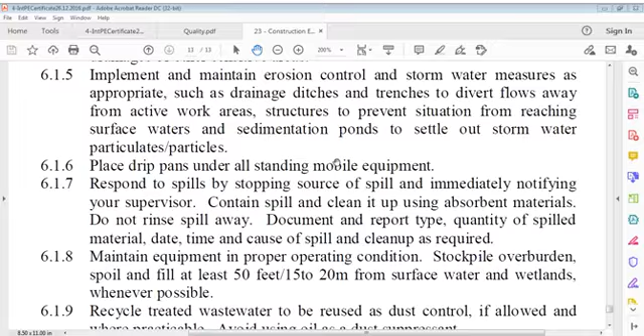Implement and maintain erosion control and stormwater measures as appropriate, such as drainage ditches and trenches to divert flows away from active work areas, structures to prevent saturation from reaching surface waters, and sedimentation ponds to settle out stormwater particulates.

Contain spill and clean it up using absorbent materials. Do not rinse spill away. Document and report type and quantity of spilled materials.

Respond to spills by stopping the source of spill and immediately notifying a supervisor. Contain spill and clean it up using absorbent material. Do not rinse spill away. Document and report type, quantity of spilled material, date, time, and cause of spill, and clean up as required.

Maintain equipment in proper operating conditions. Stockpile overburden, spoils, and fills at least 50 feet, 15 to 20 meters, from surface water and wetlands where possible.

Recycle treated wastewater to be reused as dust control if allowed and where practicable. Avoid using oil as a dust suppressant.

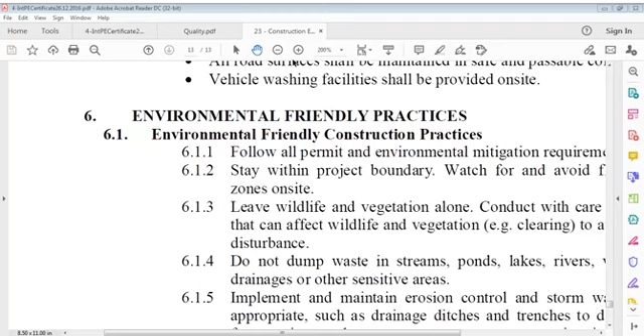We have gone through this chapter. It's a little bit interesting. We have gone through this in a way, like this, so we can say that we have covered this. We have covered this chapter in a good way, so that we can close it.

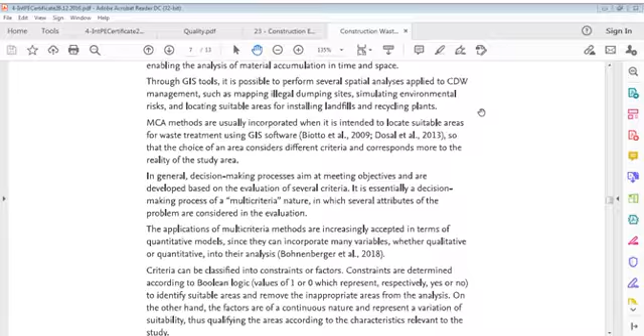And also this case we dealt with, and we have... next time what we have. Let me see, I should not have closed actually. Did a mistake. No problem, mistakes, no problem at all.

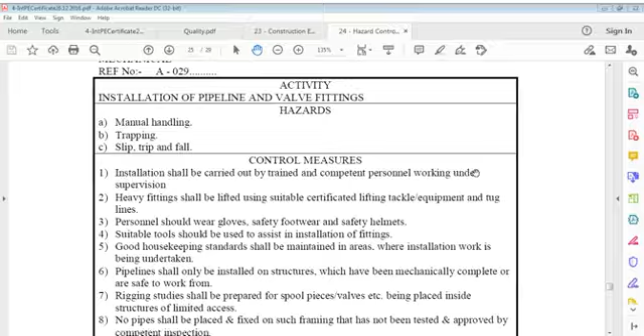So this is that type of file we will take care of next time. And now I think it's able to close. I think we close it.